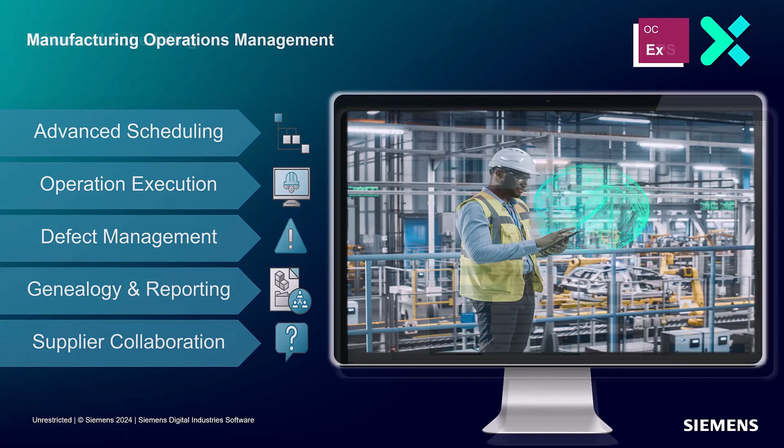For advanced scheduling, we're going to spend a day in the life of a scheduler, and we're going to generate 3 separate schedules of different what-if scenarios, looking to optimize our resource utilization, minimize our late orders, and forecast deliveries to our customers. This is Opcenter APS.

In the sequencer screen, you can see that I have a Gantt chart which has a horizontal timeline across the top. Just below are supply diamonds, which signal when material is becoming available for use from our suppliers.

On the left-hand vertical axis, we have our resources, which are operating on a 3-shift pattern. Salmon is the night shift, green is the early shift, and purple is the late shift, and we have an off-shift period on Sunday. Below the Gantt chart, I have my secondary constraints, which typically represent anything that limits a resource's ability to sequence operation.

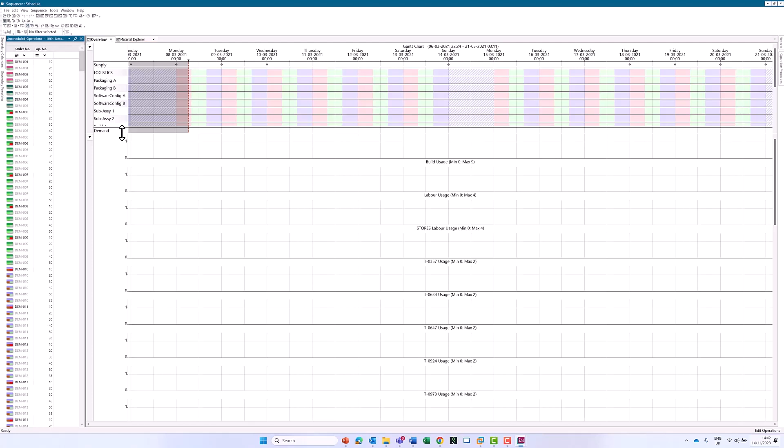In this example, I have labor and tooling as my constraints. On the left-hand side next to the Gantt chart are our unscheduled operations, which there are 1,064. Each item is represented with an order number and an operation number.

For the first schedule, I am going to activate animate sequencing so you can see how the operations are allocated to the Gantt chart when we generate our first schedule forwards by due date.

The sequencer will then group and order each operation by their due date and allocate it to the Gantt chart where there is an availability in the resource's shift pattern and the secondary constraint count associated to the operation.

Now the scheduling has been completed, I'm going to turn off animate sequencing and begin to investigate the schedule, where I will highlight an order to see its end-to-end process, from when the material became available all the way through our manufacturing facility to its finish.

By looking in the order details, I can see that it finished 2 days before its due date. We can then also view the Material Explorer, where we'll be able to see all of its material requirements, where they came from and when they became available.

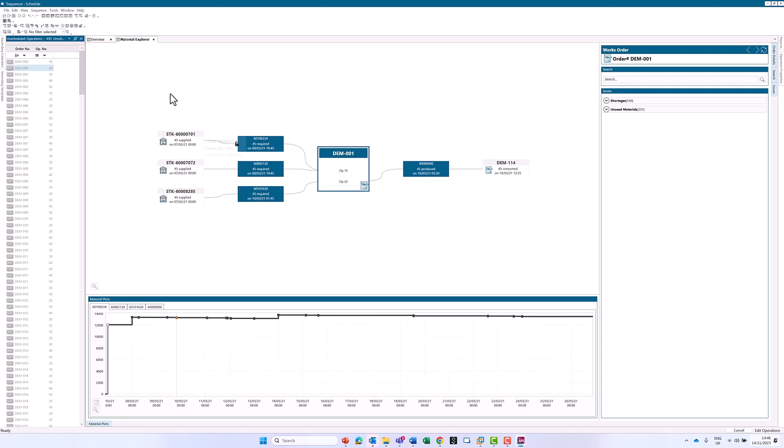Next, looking at the secondary constraints and where they're being used, I can click and drag on a secondary constraint and it will highlight each order where that's being used at that particular time.

Looking at the unscheduled operations that were not allocated onto the Gantt chart, we can investigate these to understand why that is. For this example, we can see that we have shortages in the Material Explorer, which can then be raised to our procurement team to escalate to the supplier.

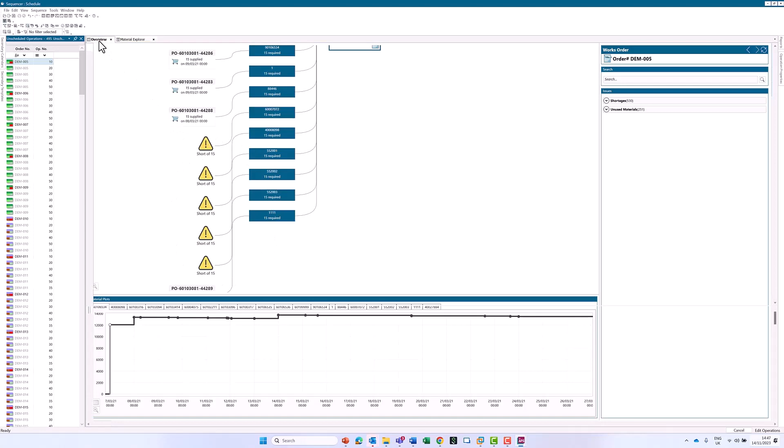So we have seen how we can investigate the details of a schedule. Let's see how we can review the overall performance.

Looking at the statistics, nearly 7% of our resource allocation is being spent performing setups. In the data, this equals 20 days worth of time.

Our on-time delivery performance shows that we only have 2 late orders, but I really want to try and optimize the schedule further by reducing that setup time, but by still keeping our late orders to a minimum.

To generate our second schedule, first we need to unschedule the Gantt chart and then sequence the work using an out-of-the-box APS rule called Minimize Overall Setup.

Here we're going to be asked for a look-ahead window, which is a forward planning time period the system will use to group the operation due dates together and sequence the workload to reduce the setup operations. The bigger the window, the more effective it will be in reducing our setup time.

In the second schedule we just generated, as we look closer, we can identify that operations are being grouped together more efficiently with far less setup operations, which are represented as these black bars.

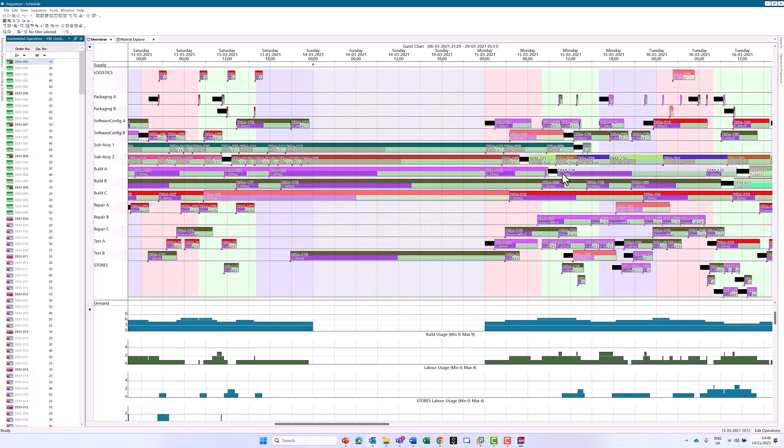Looking at the statistics, our setup has been reduced to 2%, which is less than 8 days spent on setup time. However, this has had a negative impact on our on-time delivery, as we now have 21 late orders.

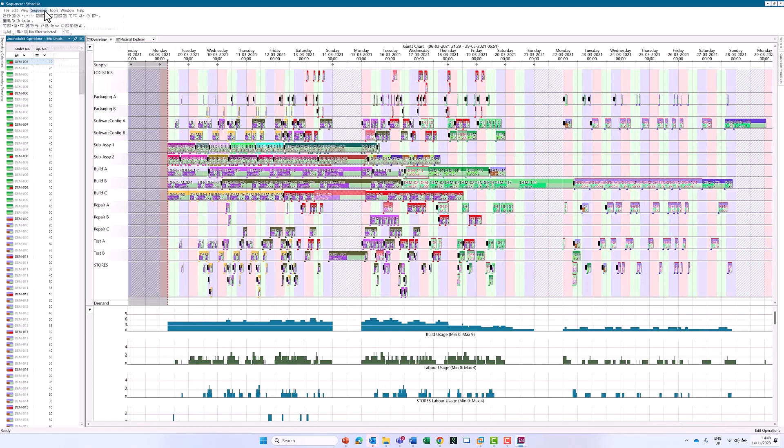Knowing this, we can generate a third schedule where we will aim to reduce that look-ahead window period and attempt to still maintain a low setup time but improve our on-time delivery to its previous levels.

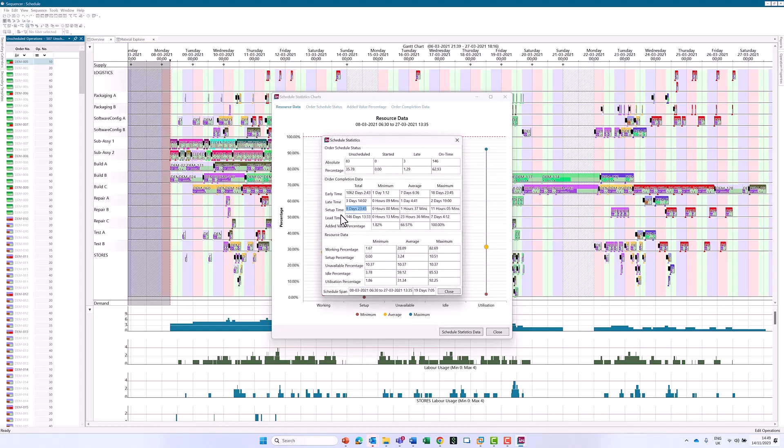For the third schedule, this shows that we have maintained a low level of setup, set at 3%, which is less than 10 days, and a 50% reduction from our original schedule. Our on-time delivery is still good with only 3 late orders, so now I feel our sequence of work has been optimized.

What I would like to do is investigate the late orders, highlight them to identify which resources are causing the bottlenecks, and then begin to understand if offering overtime on a Sunday morning will help us deliver this order on time and reduce our late orders back down to 2.

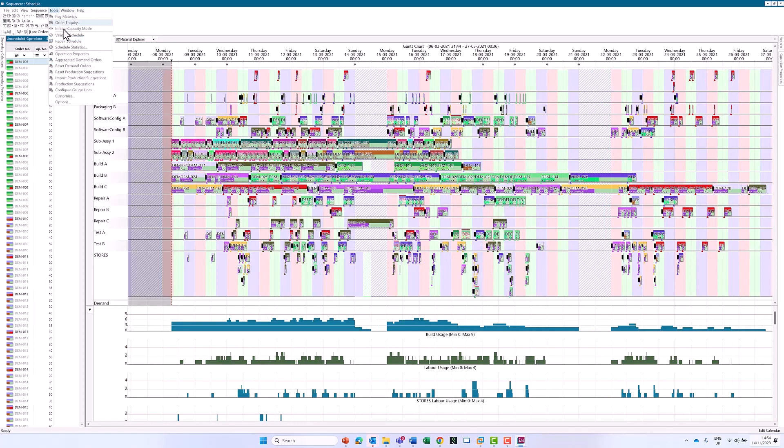As a scheduler, I was able to schedule our operations onto our resources and use our constraints, from the point the material became available all the way through to where we were able to forecast deliveries to our customers. I ran through 3 separate scheduling scenarios, comparing the statistics, fine-tuning the sequence to improve our resource utilization.

While still delivering our products on time, this allowed me to optimize our resource selection, increase our efficiency, all in a matter of minutes, in what used to take hours, or days.

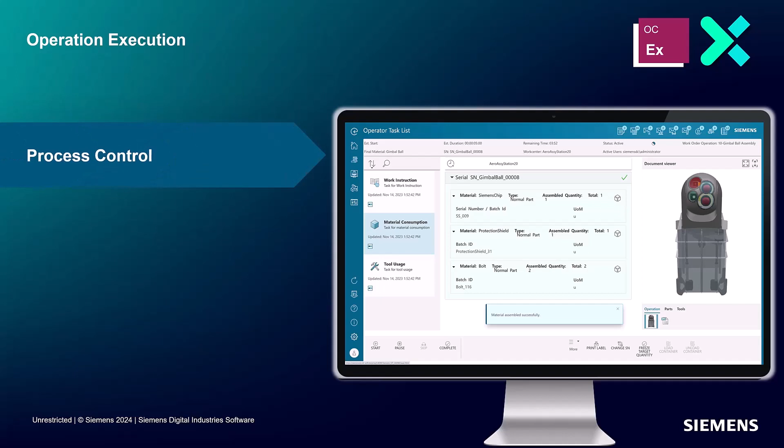For operation execution, we're going to look at how an operator on the shop floor will complete their task. We're going to step through a production order and have our work instructions and documentation presented to us on how the process is to be executed.

We're going to complete some data collection from smart tooling and validate that the correct material is being consumed.

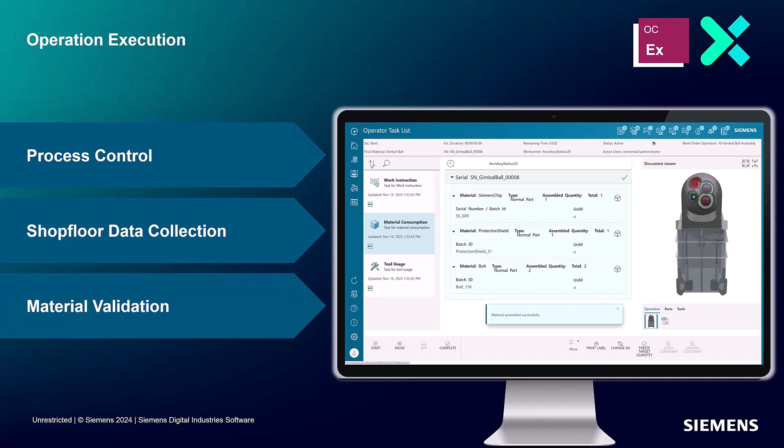The operator landing page has been designed to work on mobile devices, which are more ergonomic for the shop floor environment. So I, as an operator, can simply tap and start my operation. At this point, I'm going to be asked to select the serial number I'm going to be working on and the piece of equipment I'd like to use.

If there was a preferred piece of equipment, this could be automatically highlighted or enforced on the operation. I can see the operation activities on the left-hand side of the screen. In the center, there's a highlighted activity, and on the right is any documentation associated to the operation. These can be images, drawings, models, videos, etc.

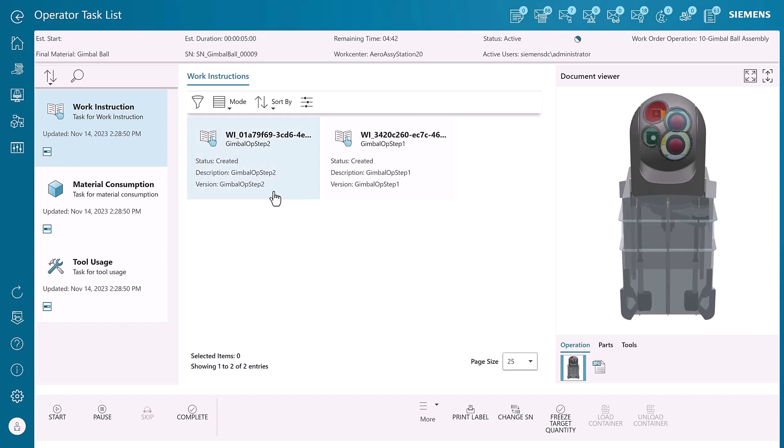In this operation, there are two sets of work instructions. The first is text-based and displays the safety instructions for the operation, which I must acknowledge, and then is time-stamped against the work order.

The second work instruction is a data collection of the torque readings, which is acquired automatically from the smart tooling and, when confirmed, is again time-stamped.

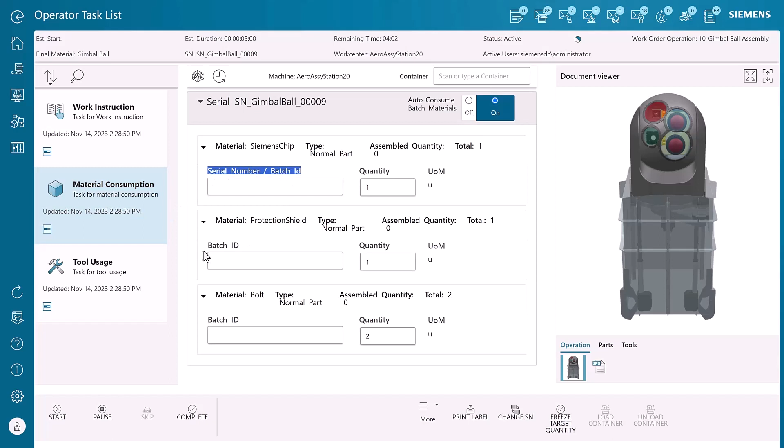The second activity is a material consumption, where material is validated at the point of its usage. You'll notice there are two types of materials: serial number and batch ID. In this instance, I have set Opcenter to allocate the batch material automatically. However, serial numbers will need to be scanned and validated against the work order.

If I scan an incorrect material, Opcenter will raise an error. If I then scan the correct material, it will assemble successfully.

Data can also be collected on the tooling being used as part of the operation, such as its ID, usage count, and duration. This can be measured and tracked to the work order and monitored against the tool's life, meaning that maintenance and calibration can now be usage-driven instead of interval-based.

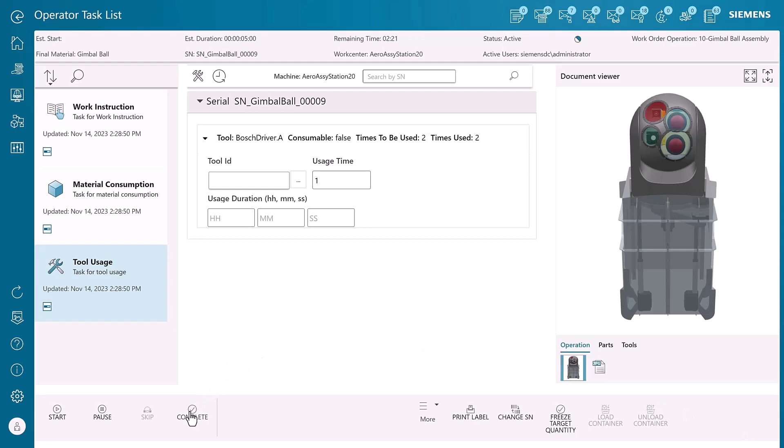On completion of the operation, supporting solutions will be updated, such as the schedule, keeping your forecast to your customers up to date, and your ERP, booking in your operational times.

So as a production manager, I'm now more confident that my operators have the correct instructions to do their task and are more likely to follow them, as they've acknowledged them at the point of execution. Key data collection activities are being acquired and logged automatically, providing visibility and confidence in the completed process.

And material and tooling are both being validated and tracked as part of the operation. Therefore, I have more control and visibility into my shop floor operations.

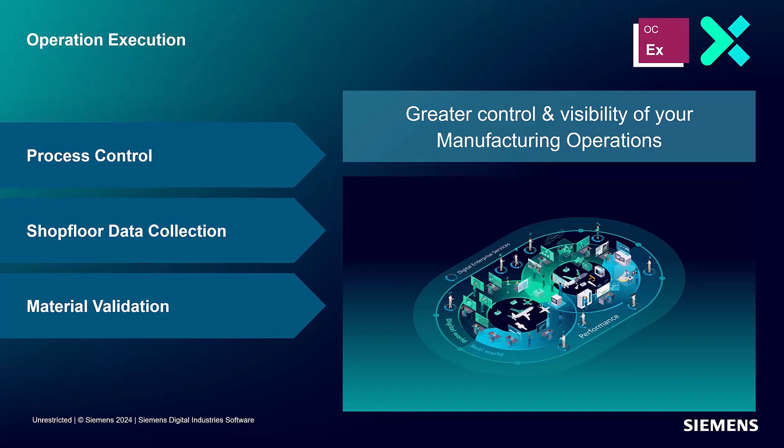Effectively managing defects on the shop floor is essential to your product quality and controlling the costs of non-conformances. We're going to jump onto the shop floor and step through an inspection operation where we identify a defect, raise it up to manufacturing engineers, and then complete the rework operation.

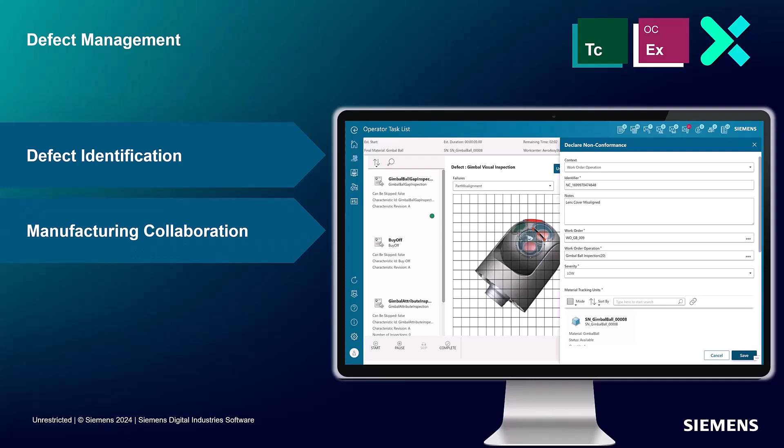As a quality inspector, I start my operation and select the component I'm going to be inspecting first, in the event there is more than one. As part of the operation, there are four separate activities to complete.

A variable inspection, which is asking me to take a gap measurement on the gimbal. If the measurement I then enter falls out of tolerance, I would then be able to categorize the failure, which will be useful when understanding long-term trends. In this instance, we're going to be within tolerance.

There is an attribute inspection, which is asking me to check a feature on the component, and in this case, I'm performing a power-on-end test. If I define the test as failed, Opcenter again will prompt me to enter a failure category. However, again, this test has passed successfully.

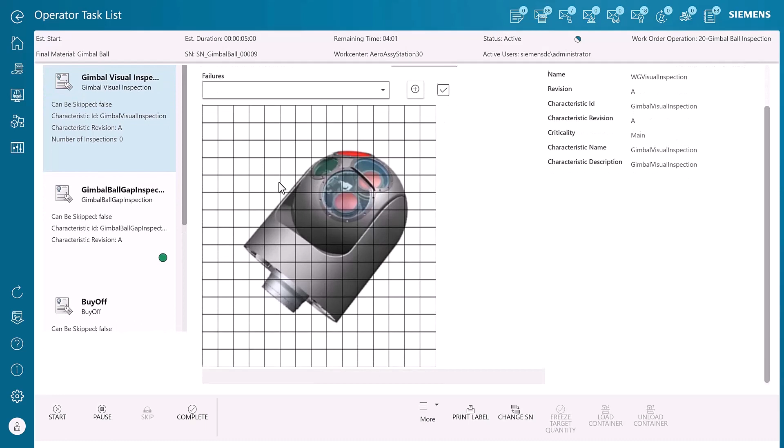The third activity is a visual inspection, which has presented me with a grid-marked visual aspect of the component, defined in Teamcenter. After finding the defect on the component, I will then select the most appropriate failure category and mark the aspect with the indication of where the defect was found.

When I raise the non-conformance, I will then be able to add in additional information to help the engineer make an informed decision on how to proceed.

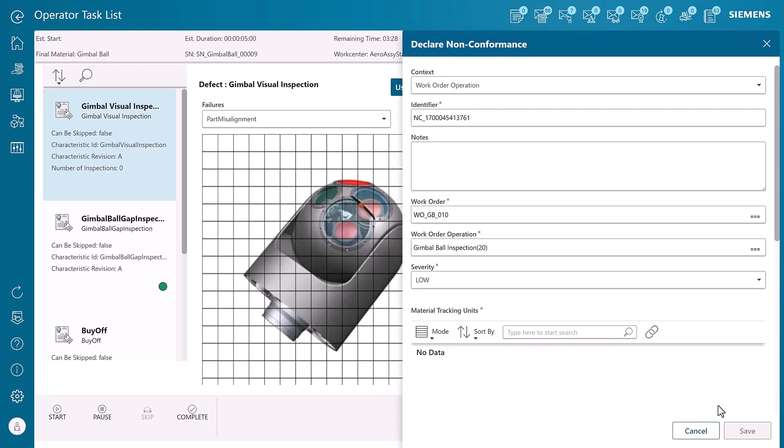This can include text, images, or documentation. I am also going to link the component serial number to the non-conformance, and that will allow us to have full traceability before I save it and send it to my engineers.

As a manufacturing engineer, I will now receive a notification, both via email and in the system, that a defect has been raised and it needs my attention. I will be able to review the defect within the non-conformance tab to review all the details provided by the operator, such as when it was raised, the operator who raised it, the work order, component details, and the operation.

The associated failure category is also presented. I will be able to see the full history of the notification and any changes that were made with any documentation or notes provided. On review of this non-conformance, I am aware of this as an ongoing issue.

It has a predefined rework process, so I'm going to change the status of the non-conformance to rework and select the associated rework code, which will send it back to the shop floor for rework execution.

Returning to the operator landing page, I'm easily able to find the associated rework order by the naming convention setup, so I can simply select and start it as if it was a normal order.

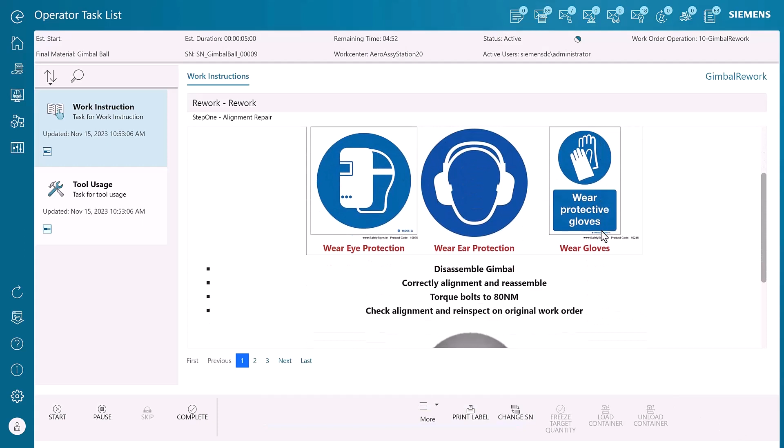In this operation, I have a set of work instructions which cover the health and safety and how to proceed to disassemble and reassemble the gimbal to correct the alignment issue that was found.

There is a data collection requirement for the new torque readings as part of the bolts being retightened, and a confirmation from the operator that the alignment issue has been corrected as part of the rework operation.

Before we complete the operation, because we are tightening bolts, we are also going to collect data of the tooling that has been used. Now that the rework operation has been completed, the component has been returned to its original work order to be continued.

You will notice that the operation has been placed on pause for the duration of the rework. The previous visual inspection with the defect is still present as part of the operation.

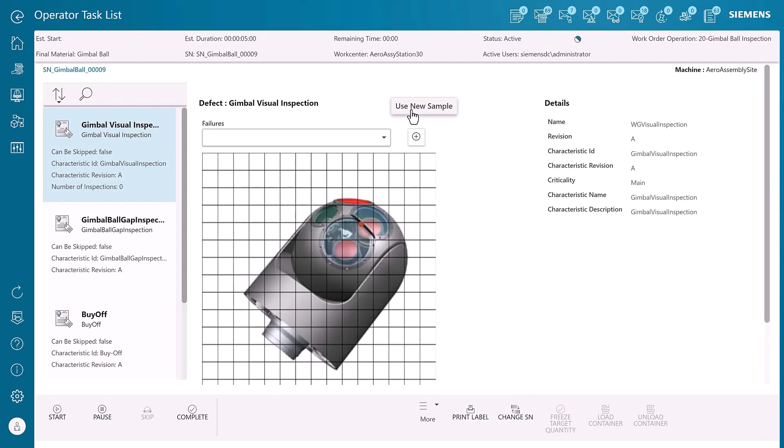So we will request to use a new sample and confirm that no new defects were found. The genealogy of the order will hold both visual inspections details.

For the final buy-off, we require the approval of our supervisor, where they will be required to confirm that they accept the work that has been done and sign it off using their credentials.

Now that there is direct communication and improved collaboration between your shop floor and engineering, defects are going to be identified and then solved more effectively and in a timely manner.

Rework operations are being executed within Opcenter, meaning that you have full traceability of the work that has been done. Costs associated to your non-conformance will be reduced as the life cycle management of them is improved.

We have seen how Opcenter is monitoring, providing controls and data collection for our shop floor operations. Now let's see how it will provide our manufacturers with the end-to-end visibility needed to provide a complete traceability of our products, and how it will help us meet strict regulation compliance that's relevant to our industry by having reliable and comprehensive data at our fingertips.

And how it will monitor the performance and output of our assets.

Every interaction that we as an operator have had with the production order has been recorded and stored in the genealogy of the component, including the rework of the defect we found as part of the inspection.

We can then drill down into the rework order, select the operation, and see each interaction taken as part of that process, such as the tooling usage, the torque readings, along with the others.

If we look at its original production order and open Op20, we can see the details of the non-conformance, its associated defect, the gap inspection value, the attribute inspection confirmation, and the total number of visual defects that were identified both on the first and second inspection after the rework was completed.

In Op10 of the production order, we will be able to see the material consumed, including the serial numbers, and the work instruction acknowledgement from the operators. All of this information provides detailed traceability and visibility of our products and valuable process documentation for auditors.

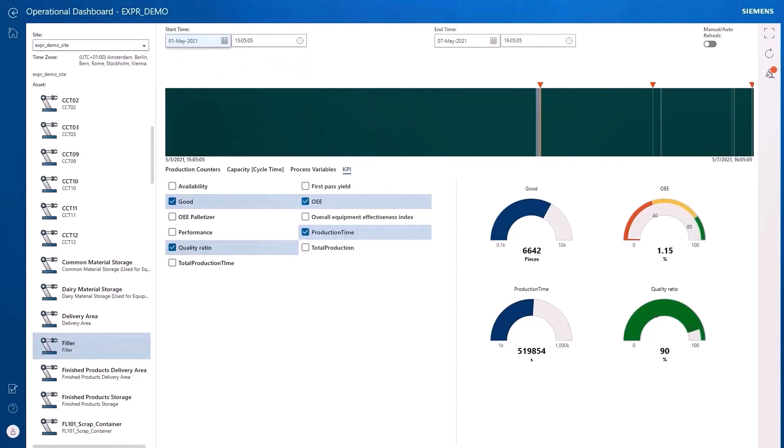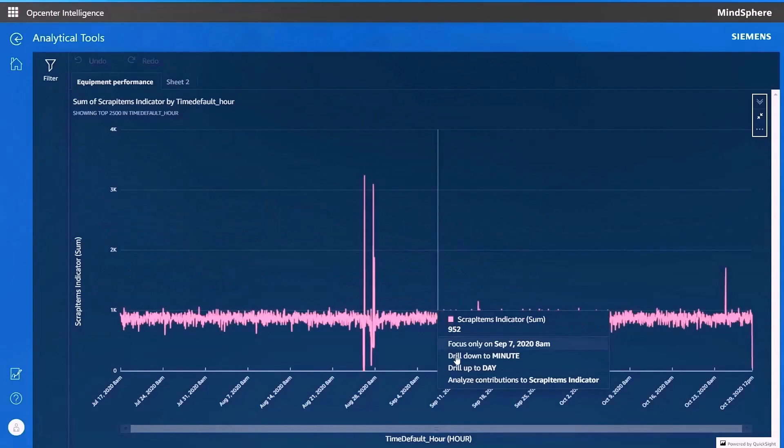All of this can continually be scaled to suit the audience and provide analytical dashboards monitoring trends across multiple sites, enabling more informed decision making from senior leaders who can drill down into these trends and focus on the important details of their operations, creating more focused initiatives for improvements.

With that end-to-end visibility and traceability of our products, we can provide our customers with more confidence. We have the reliable data and documentation of our processes to meet our regulation standards and compliance. And monitoring performance will allow us to make better decisions on how and where we need to improve.

So it's clear how Opcenter can bring value and improve the operations of our manufacturing environment. But what about our suppliers?

Manufacturers are heavily reliant on the performance of their suppliers, and it's very common for components to be lost or damaged as part of that transaction. We are going to see how we can improve visibility into the operations of your suppliers and have full traceability of the components the supplier has and interactions with those components, and then be supplied with the quality assurance of the components digitally before they are returned to site.

The Opcenter Supplier Collaboration app provides the suppliers with the manufacturing execution capabilities of Opcenter without the need for them to have the software itself.

As production orders and/or operations can be transferred to an external application to be executed offline, these can then be sent to the supplier either via device or via a file transfer. Therefore, the supplier will have all the necessary information they need to complete their operation, but nothing you don't wish for them to share.

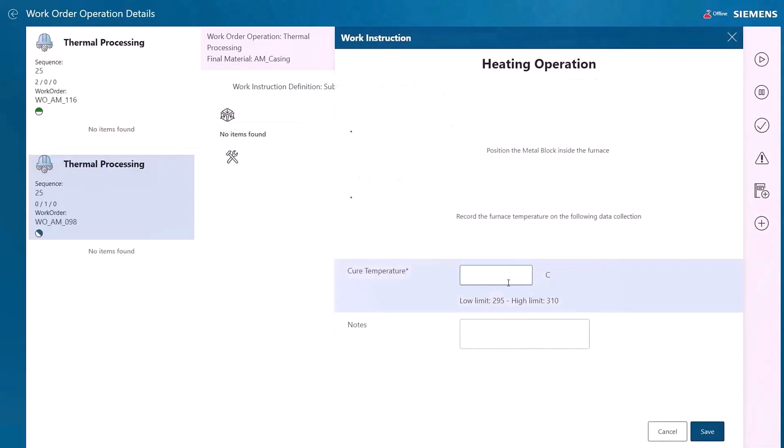As the supplier then completes the operation, data can be logged and collected as set out in the work instructions, meaning you will have full visibility of their process and traceability of it against the component's serial number.

They will also be able to attach the certificate of conformance to the production order at their site, therefore reducing paperwork when handling the goods receipt.

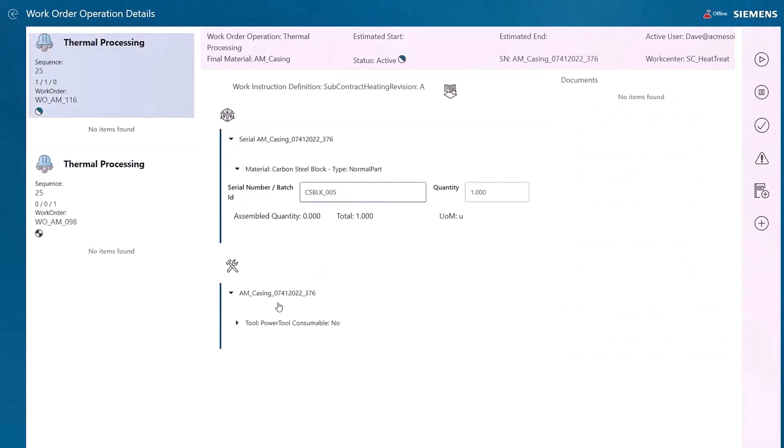Any defects found and non-conformances raised by the supplier will be done so within the solution, giving you full visibility of the details as we have previously seen in the defect management section.

On completion of the work, the supplier can then transfer the files back to your site, where you can then download them and view all the details, such as the non-conformance, process documentation, and the certificate of conformance, before you make a decision on whether you want that sent back to your site.

So therefore, if there are any discrepancies, these can be amended before the transfer of goods happens, avoiding any unnecessary transportation costs and lost time.

Within the work order's genealogy, you will be able to see the full visibility of the supplier's interactions, same as previously shown in the genealogy and reporting section.

Seamless transfer of process documentation, full visibility into your component's external operations, and reassured quality controls and measures will enhance your collaboration with your suppliers and increase the value of your relationship to each other.

Siemens Opcenter is focused on helping manufacturers of all industries to improve the quality of their shop floor operations by breaking down the silos between your operators and your engineers.

Our solution is designed to integrate with PLM and ERP solutions in an aim to standardize the way people work, avoiding redundant data and providing a single source of truth. It's then built with the flexibility to run on mobile devices so that the shop floor environment can embrace digitalization with convenience.